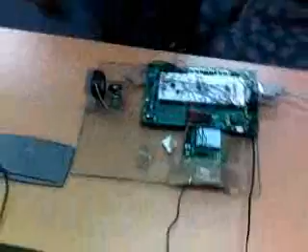Hello and welcome to speed control of a DC motor.

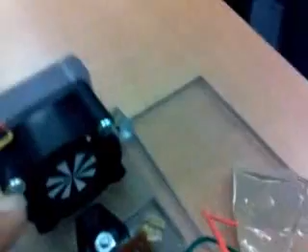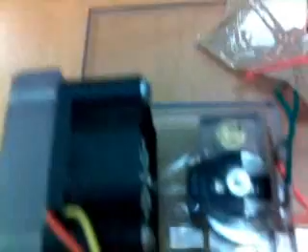This is the setup that we have built up. This is the motor that we have, and this is the encoder, and this is our sensor. And on this mount, this is the ideal position that has been set, and this can be also adjusted over here with the help of this nut. This can be loosened and the sensor can be brought near or farther away from the fan as required.

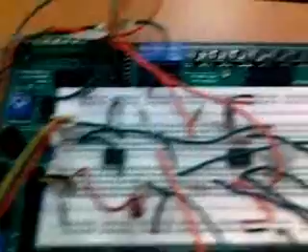And here we have the entire circuit. We are actually using two boards. This is the master board, this is NX1000, and this is the slave board, BOE. This is only used for the purpose of providing PWM. And let's move on to the GUI in MATLAB.

We are using asynchronous communication with the computer. As you can see, this is a USB cord connecting by the RS-232 line. Yeah, that's all for the setup. So here is our MATLAB GUI.

First of all, we will move on to the diagnostics part. By the way, I will just tell you that we have the calibration here, we have the controls here, required RPM can be fed here, and the system can be run or stopped from these radio buttons. Moving on to the diagnostics, I will hit this diagnostics button.

Now what will happen, the system will attain its maximum RPM and it will try to judge whether the system is healthy or not based on the RPM count. So as you can see, the RPM count registered is 65 and the corresponding maximum registered RPM is 4875. So the system is in healthy state. This can be used basically to debug the system in case there is any error.

Now moving to the calibration part, we have three levels of accuracy here. We have the high, the medium and the low. So we'll first try with the high accuracy. Basically, the higher the accuracy, the more the time that is taken to calibrate the system. And so if I hit the calibrate button, the system will first attain its maximum RPM.

It will stabilize at that RPM and then it will try to reduce the duty cycle and the corresponding optical encoder count will reduce. So we have finally an equation from the optical encoder count to the duty cycle, which can be used for open loop as well as other different kinds of controls. So as you can see, the duty cycle is varying and the optical encoder count is reducing.

The system basically is showing a second order, second degree polynomial kind of response. So we finally fit a second order polynomial in this. You can see the root mean square error here, the coefficient of determination and the duty cycle equation. Based on these statistics, it will also recommend whether the calibration is good or poor.

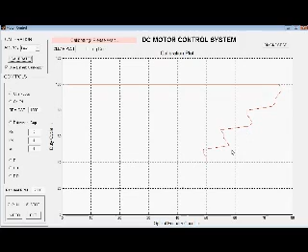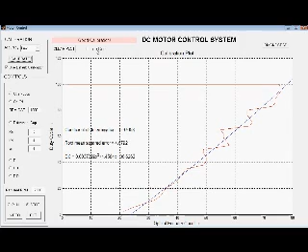So basically we are reducing the duty cycle by larger steps in this case, and so you can see the root mean square is a bit more, but still it's kind of good, so it's showing the good calibration. So using the default calibration, we will first move on to the open loop control. The required RPM is set to 2000 and we will hit run.

So we have now the two plots. One is the RPM plot, another is the RPM error plot. So you can see in case of open loop control, though we have a stable RPM, there is quite a lot of steady state error in the system, and so the open loop control is not that good in industrial control.

I will stop the system. Now moving on to the on-off type of control, I'll hit the on-off control run button. So you can see there are a lot of fluctuations in on-off control. Though it is able to track the signal, you see a lot of fluctuations and oscillations in the steady state as well. So I'll just hit the stop button.

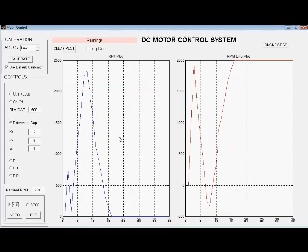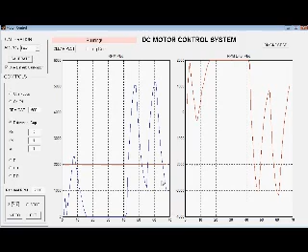Now moving on to the differential gap, we can also set the gap. Say I will set it to around 500. This is basically the gap at which the switching will take place. I will hit the run button. You can see that sometimes the system fluctuates, and now it's trying to track the signal. So though the RPM gap is mentioned as 500, the switching actually takes place after 500, and that's why there are a lot of oscillations in the response.

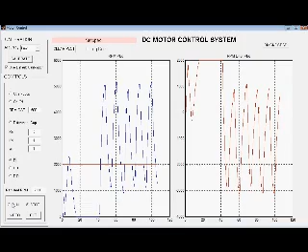I'll stop this thing. Now moving on to the P control, I'll just hit the run button again. We can also set the KP, KD and KI values. So you can see there is a steady state error with the proportional control, and since only the integral control can control that, we will have this kind of error in PD control as well.

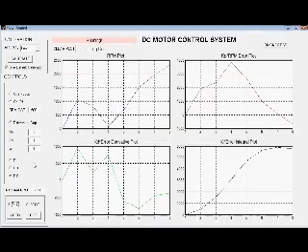So now moving on to the PD control, hit the run button. So you can see again there is a faster response time because of the KD present here, but still we see that there is an error. I'll just hit the stop button again. Moving on to the PID control part, I'll hit the run button again. So in this case, just hit the stop button.

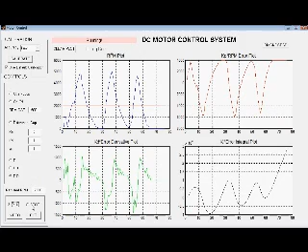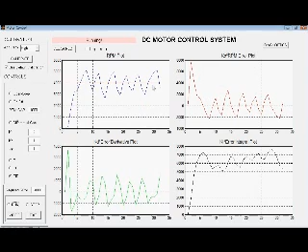So moving on to the PID control, I will set the required RPM, say around 4000, and I will hit the run radio button. So you can see the system is trying to attain the 4000 RPM, and it has some overshoot in the beginning, and then the magnitude of the overshoot is reducing, and the system is trying to track the required RPM.

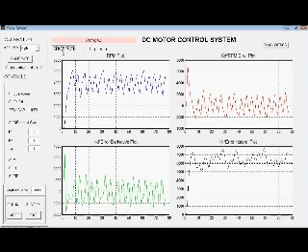The performance of the system can also be varied by feeding in different gains, KP, KD and KI, based on the requirement. So I will stop the system, and we can also clear the plot if I hit the clear plot button. Here also the data logging option is there, so we can log the data, the response of the system.

And we also have a video option which can be used to monitor the system, the actual setup, but since the drivers are not working, the video is not there. The video preview window is through MATLAB, so we have interfaced the webcam through MATLAB, and I will now hit the exit button. We'll give a short demo of how our system responds to external physical disturbances.

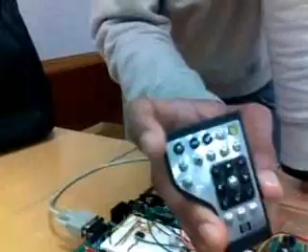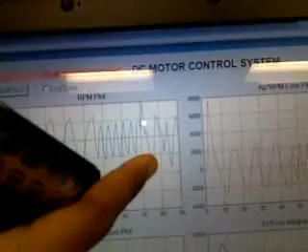Now here is an IR remote. I'll give the disturbance slightly with this. Is it visible? Yeah, it must be visible in the webcam. Okay, now as you can see, I'm giving a slight disturbance, and you will see the corresponding change in the waveform. As you can see, there's a sudden drop, but our controller tries to bring it back to the steady state.

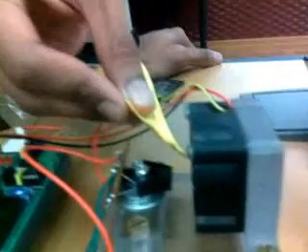Now there's another physical disturbance. I'll bring it through a paper. As you can see, there's again a slight disturbance here caused by the paper, but our system comes back to stable mode.